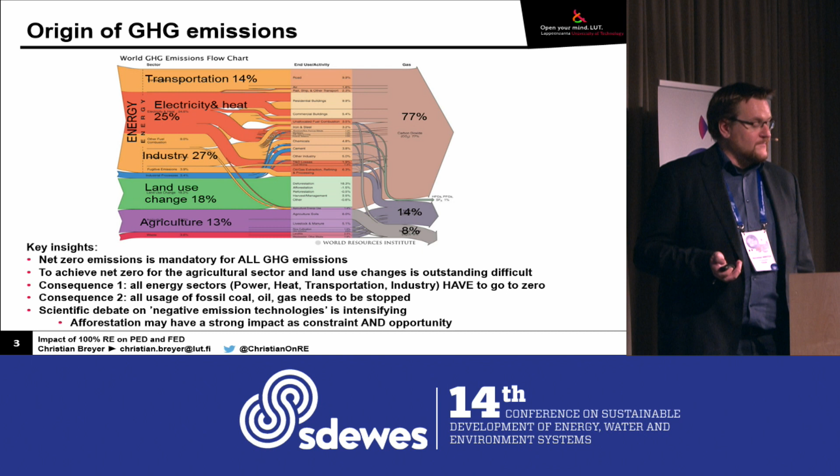Because to be net negative, we already have to fix the agricultural sector in particular, so there is no excuse in the energy system. Every fossil molecule in 2050 which still remains in the energy system is a failure. That will be the consequence of that. Luckily, more and more get this point. I was very happy to see this news. It was spring this year that

several European member states called on the European Commission: please provide us better scenarios. Because last autumn we got a lot of nice European Commission scenarios. Even net zero emission scenarios have been there, but not a single 100% renewable scenario. And this violates the policy of several European member states, where it's the clear dedicated policy target to go for 100% renewables. So that's good news. We already saw the picture of Greta Thunberg today. And please remember what we have observed just a few days ago.

This was for September 20th, where there have been the climate demonstrations, school strikes all over the world. In this one single week, which had been the peak of this demonstration so far, there have been 7 million people, most of them not even yet allowed to vote, on the streets globally, on all continents, in several countries, in several cities in the world. It had been by far the largest demonstration on any topic ever in history, and we should take it seriously. So hopefully in a few years we can say this had been the societal tipping point.

It was already mentioned that not everyone has the idea that kids should fight for their future. Luckily, with Scientists for Future in several countries in the world, we nowadays even have a science paper on that from different scientists in the world supporting it. This is just another paper from the German-speaking scientists. So it's really important that we have this very strong alliance, that the youth of the world really do what they have been taught in school: rely on and trust in facts. And these, of course, one can find in science. Maybe this is nowadays, unfortunately, news in policy, but it's important that we go back to science and facts.

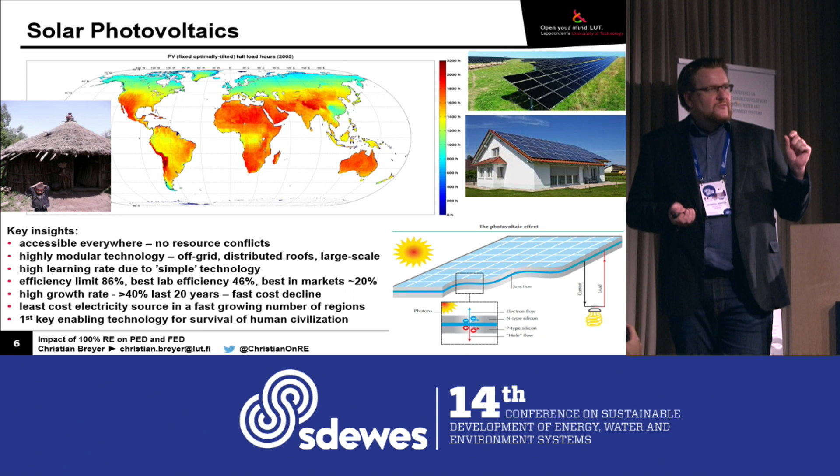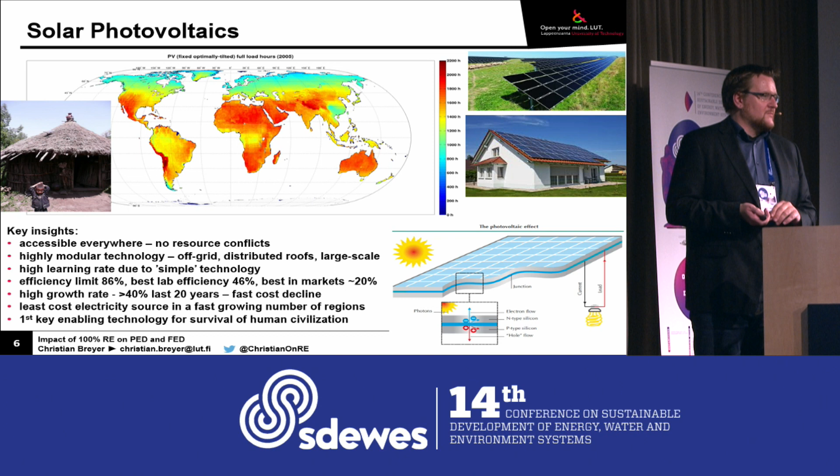The most important number on this diagram is the number you cannot see directly. It's a factor of 2. Go to the moderate regions, the subarctic, I'm from Finland, and then take the very sunny regions in the world: there is only a factor of 2 in solar irradiation. That means if it costs 2 euro cents a kilowatt hour, or 20 euros a megawatt hour, to produce solar electricity in the Sunbelt, then it costs 40 euros a megawatt hour in the subarctic. This is the most important message. And it will further decline.

Then a most important further component, batteries and electric vehicles. So as a stationary battery in buildings, this is Tesla Model 3, what we can even enjoy here, so that's really great. And we see steep growth rates for electric vehicles in the recent years, between 50 and 70%, and this is exactly what we need. This is also driven by cost decline of the battery cost, and in the end this will be very beneficial for both of these products, but of course we will see it in more.

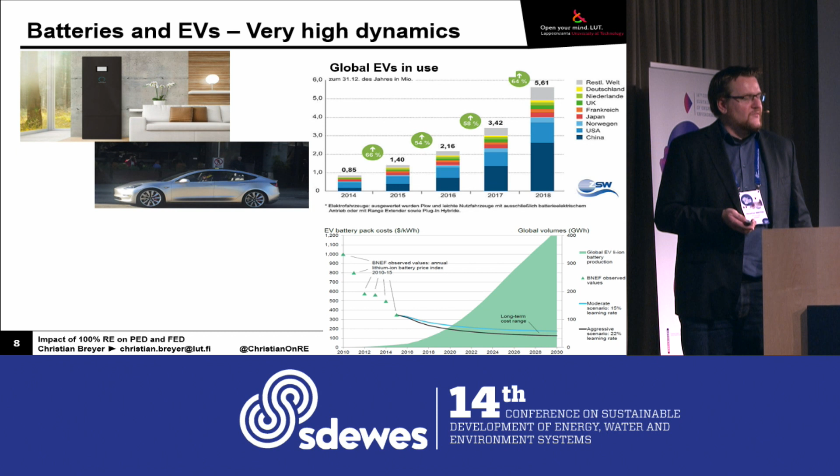And then the fourth most relevant technology, or it's more a bunch of technologies, for the most complicated and really hard to abate segments of the energy system, is all what we call power to X. If the starting point of research started in the fossil world, then we typically call it CCU, but in the end it's typically the same, whether we have carbon capture and utilization or power to something. From a specific point onwards, we all talk on the same topics.

The idea here is that we have sustainable electricity, then we go to hydrogen, where we need then water. If we want to go to hydrocarbons, then we need the CO2 from somewhere. If we have a sustainable CO2 source, and some of them exist, or a not avoidable CO2 source, just think on the limestone part of cement mills, very, very difficult to substitute. Then we have waste incinerators for municipal solid waste.

There will be always something remaining. And then, for example, pulp and paper mills, sewage treatment plants. So we have some point sources of CO2 we can use very well. And the rest we can take from the air, as this indicates with CO2 direct air capture. And then we get the entire world of hydrocarbons.

So we have to start with CO2 or carbon monoxide here. With hydrogen we have the syngas. Then we can go to methanol, to olefins, we can go to Fischer-Tropsch with diesel, naphtha, whatever we want. Or, of course, with hydrogen, and again from air, but then it's nitrogen from the air, we can go to ammonia, we can use it as a fuel, we can use it for fertilizers.

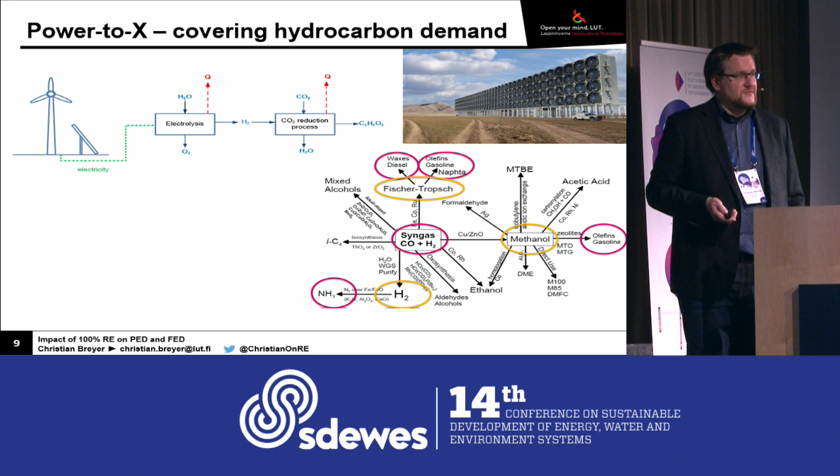And only the ammonia industry, as of today, where the hydrogen comes from fossil steam methane reforming, produces 1% of all our greenhouse gases. And the entire chemical industry, 5%. So there is a lot to be taken. Now there is a very strong rationale for electrification, and this is in the end efficiency. And this brings me already close to the core topic of this talk.

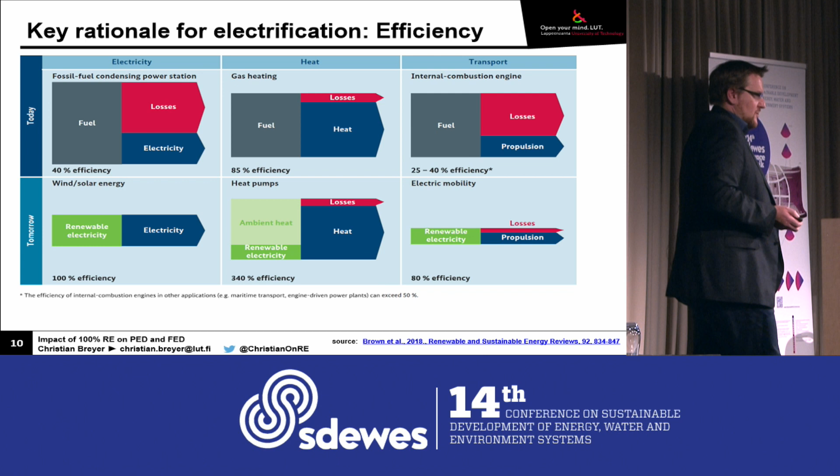Let's start with electricity. So what is the main segment as of today where we get electricity from? It's typically thermal power plants. 40% efficiency, by the way, is already optimistic. In the latest World Energy Outlook, you find that the average efficiency of all thermal power plants in the world is 35%. So the consequence in the real world is the primary product of these plants are clouds and warm water for fish when it's cooled down. In other words, the second law of thermodynamics is not our friend when it comes to efficiency. So this is the cause of it.

When we compare that to renewables, then we have very, very high efficiencies. And here I have to explain how we define primary energy. Primary energy, at least in most definitions, is when we extract energy for the very first time from the environment. The consequence is that crude oil produced, or gas in a gas field, or coal in a coal mine, is then defined as primary energy. The same when we cut down a tree, from this moment on it's primary energy.

However, it's the same when we have a water flow through a turbine, then we have primary energy, but then it's now electricity. It's the very first time that we extract it from the environment. And of course, the same is true when we have a wind turbine where we have the wind flow, then it's converted directly to electricity, or the same with a photovoltaic system. Due to that, this is the right comparison of efficiency when we have the first step of primary energy.

We can compare that to heat. If we have very efficient heat systems, then we can be maybe even up close to 100%. We know such solutions, they're really great.

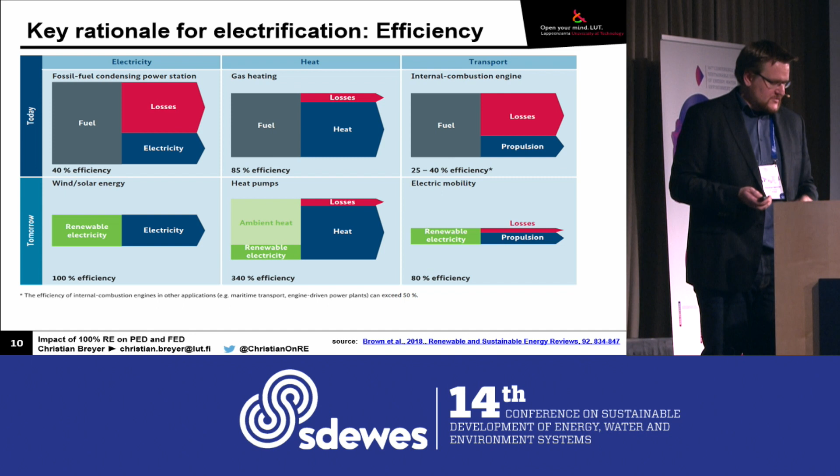Okay, so let's have a preliminary insight for the energy transition to very high shares of renewables. First of all, the increase of efficiency is the substitution of thermal power plants with renewable electricity, the introduction of heat pumps, substitution of combustion road vehicles with battery electric solutions. By the way, thermal desalination with reverse osmosis is the same. There we have the highest efficiency gain. We talk on a factor of 4. So this is really outstanding. But there is a phase change in between that makes the difference.

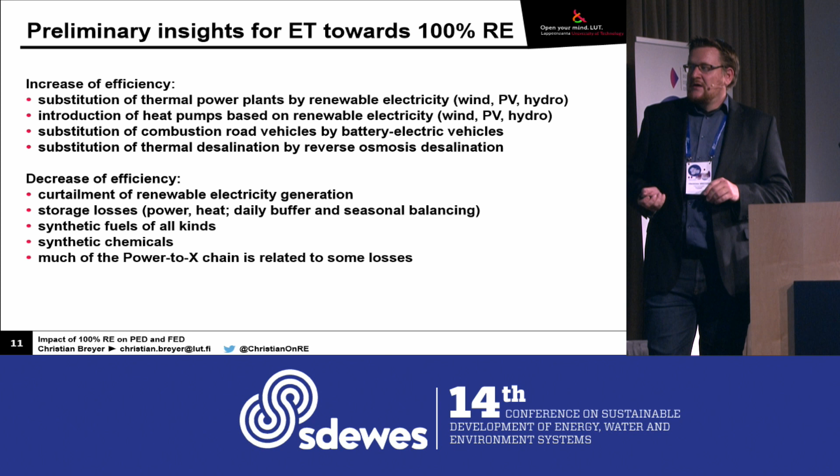However, we have also other factors, and this makes it a bit more doubtful. And of course, the opponents of highly renewable solutions always point to these items, and of course we have to investigate more. The curtailment of renewable electricity generation is a loss of energy without any doubt. We have storage losses for power, for heat, daily buffers, seasonal balancing. We have synthetic fuels of all kinds that we need if we want to remove all fossil fuels from industrial and energetic use, synthetic chemicals, and much of the power-to-X chain is related to some losses. And now the key question is, are the efficiency gains higher than the additional losses? Good question. It took me the last 10 years to get a bit closer to that, and I would like to share some of the insights.

First of all, a quick overview on 100% renewables. So we have now more than 50 countries committing to that, and I think it was really a tipping point when California switched last year. Then everything became much more serious, and the opponents, how to say, put down their volume. We have it with cities. Several countries are already there, by the way, and more companies committing to the target, which is really good.

And I'm very happy that Henrik Lund is just sitting here. We did this paper together where we did a kind of first overview of where in the world 100% renewable energy systems are studied. And we have to conclude that in Europe we understand it quite well. In Australia it's very well understood. In the US there is a super good leading team. What the rest of the universities do on the topic, I still question myself. But for the other regions in the world, it's not yet well understood. So much more emphasis has to be placed there.

And what's important, of course, we see a growing trend, in particular for the last 10 years, that there are increasing numbers of papers, and also more and more of the papers really focus on the total energy system, what we then call a smart energy system.

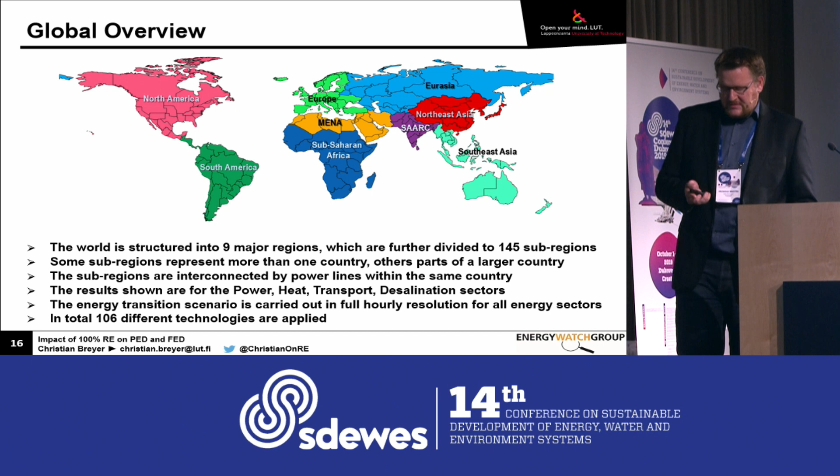What does it mean for electricity generation? Here you can see we have this year maybe around 28,000 terawatt hours of electricity demand generation, and that will go up far beyond 100,000 terawatt hours. But of course the reason is that practically the entire energy system shifts toward electricity, and the reason is in the very end that here we find the sustainable solutions in an affordable way.

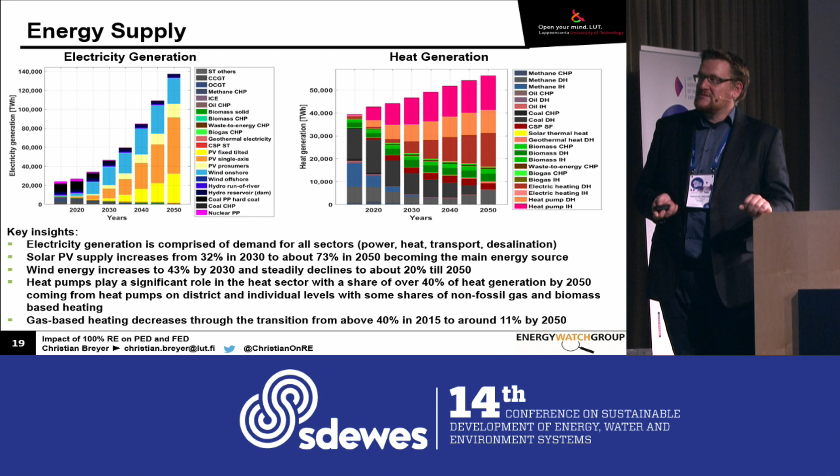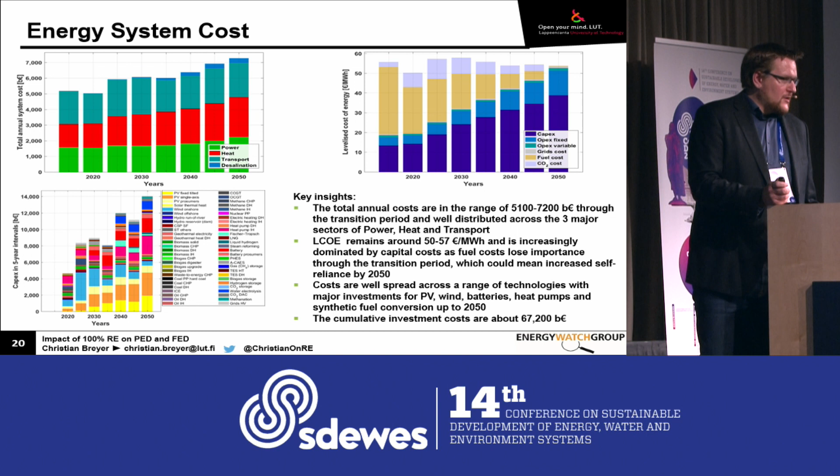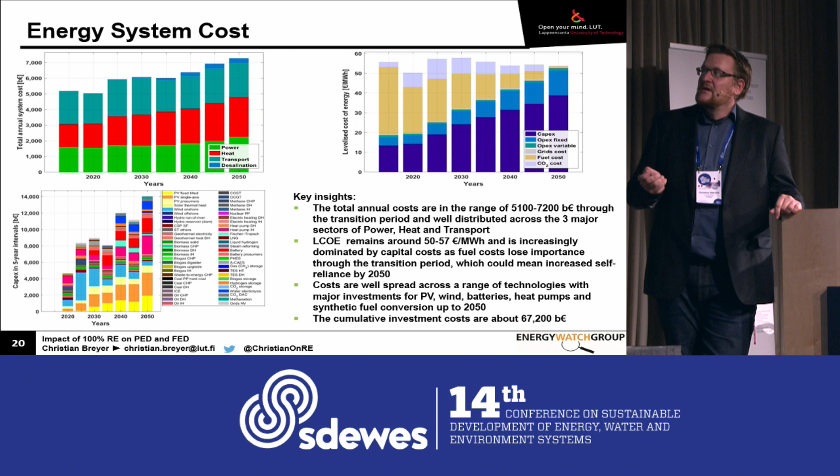What does it mean now for the energy system cost? Because we all know the creation of such scenarios might be not so complicated. We do it by definition, but in the end it's always the question of society how to pay for it. And I guess here the message is really different, because the message is, yes, we can go for a transition, and I will show you in some slides later. We talk on a 1.5 degree scenario in the very end. But the transition can be in a cost-neutral way, if we do it in an optimized way. And this is, of course, in strong contradiction to what we typically hear from 1.5 degrees Celsius scenarios, and I will come back to that in my very last slide.

The question is then, do we need some storage? Yes, of course, we need quite a lot of storage, as you can see here. So storage output for electricity sector, for heat sector. The good news is, if the cost of batteries go down as we saw in the last decade and as it's projected to continue, then we have the perfect basis for a most efficient storage. First of all, we can use them for a long enough period. We can, in principle, recycle them, and the efficiency is high. So that's all very, very good. As a consequence, a lot of batteries are found in the solution.

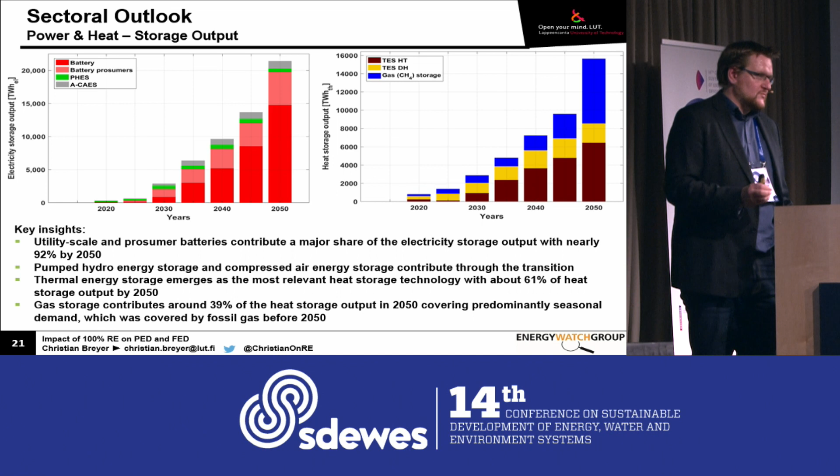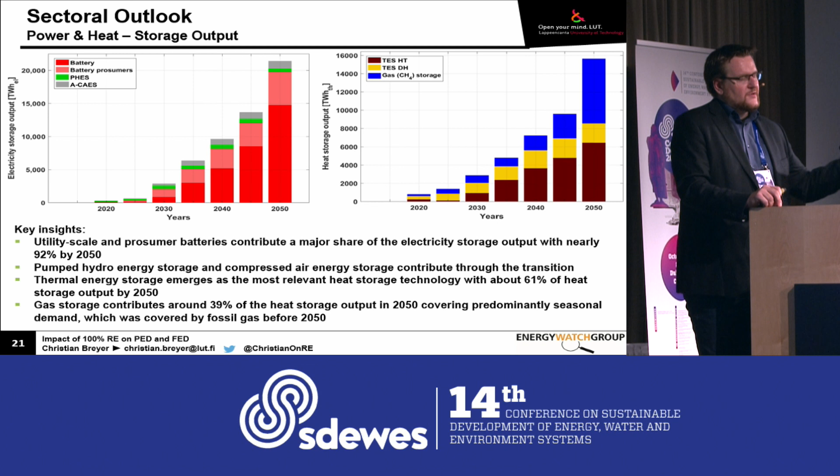When it comes to heat, then it's high temperature heat storage, district heating, of course, and gas. Gases, we modeled it to be on the safe side with methane, but I guess in the next update there will be not much methane any more, and the reason is we don't trust that the leakage is zero. Whenever you have a leakage in the methane system, then you have one methane molecule with a factor of 100 more global warming potential in the next 10 to 20 years compared to a CO2 molecule. And since we are close to the major tipping points in the world, it's not acceptable. So we have to be very careful when it comes to methane, if there are better solutions, of course.

Transport sector, this is important to explain to you. We are super conservative from the other side in that scenario. And super conservative means there is a factor of 3 assumption for more transport kilometers and passenger kilometers from 2015 to 2050. So a factor of 3 in more energy services. This is based on respective international references from IPCC or International Aviation Association or International Maritime Organization, so we should be on safe ground. But this is in strong contradiction to most global 100% renewable scenarios. Most assumption there is we will not travel much anymore. And I don't trust in that, because I know all of us, and that we send the goods all around, so better be on the safe side. If we need less of the services, perfect, but better to be conservative, to have a higher assumption.

Here, for example, the assumption for cars: the current car stock in the world is 1.2 billion cars, which grows by 100 million cars a year, and we have the assumption to stabilize, hopefully, around 2.5 billion cars, or 3, but somewhere in that order. But this would already assume that, for example, in a region like Europe, we all together have fewer cars per capita. Hopefully this trend will happen. But the good news is, if we then factor this through our model, then we find that despite the factor of 3 more services, the final energy demand stays more or less stable. And this is, of course, quite remarkable.

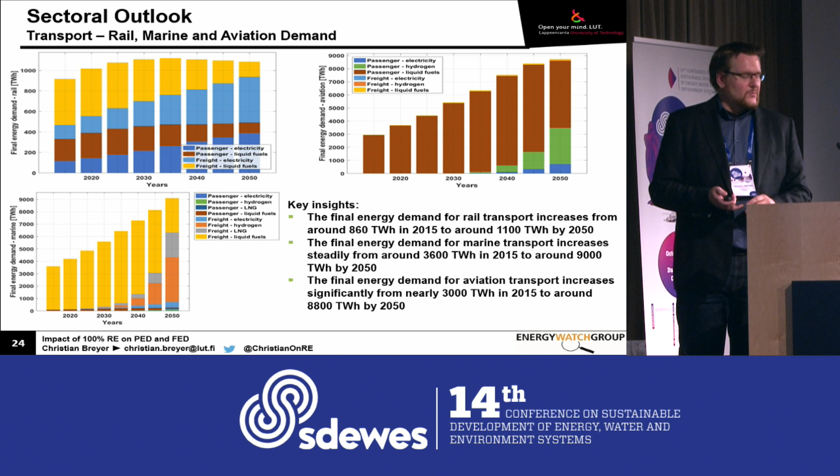And there you can see that even with a strong increase in demand, the total final energy demand for road goes down. It's not so lucky when we talk on marine, what you can see here, or aviation, what you can see here. Here really a factor of 3 in more demand really translates to more final energy demand. And this, of course, from a primary energy point of view, hurts even more if we go to power to fuels. And this you can see here.

And this is, maybe I focus on this diagram here. This was also kind of a shock for me when I saw it the very first time. When you regard the full transport sector, and please do that, we have several models where the transport sector is modeled, but only for the road segment. But the road segment might be hard to believe, but still the easygoing part.

What is really, really hard is marine and aviation, because there we have either huge volumes of biofuels we may not have, or we have to do it with power to fuels. But other sustainable options we don't have, except we go for the degrowth option, and then we do not send goods and people anymore around. But it's complicated to find a good solution.

Direct electrification when it comes to train, short distance shipping, we have assumed direct electric. We know there is a policy target in Norway in 2040 to have all flights within 500 kilometers around Oslo all electric. And there are currently a lot of development startups and companies developing all electric flights with up to 100, 150 passengers. But the point is most of the flights are intercontinental. So in the very end we have roughly a third with direct electricity, and then is the question how to do the rest.

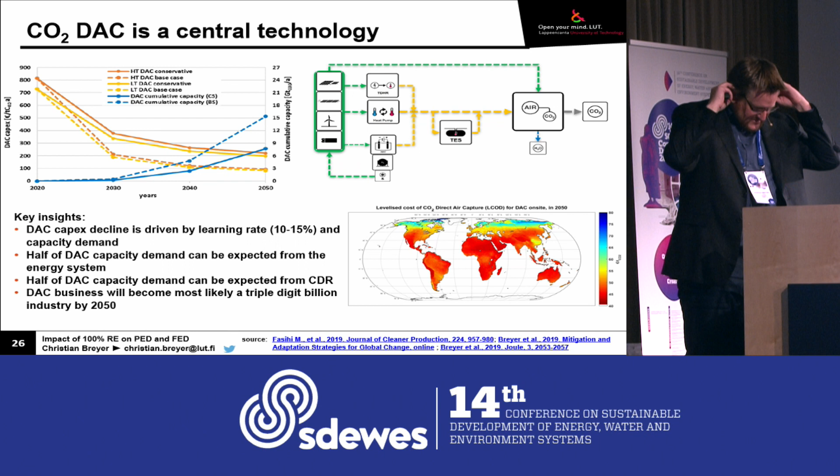Oops. So it should work now again, sorry.

So we should have good chances with heat pumps, and then we can extract CO2 from the air. If you look into the literature, then typically you find very high cost points based on a technique which requires very high temperature. At least these are most of the publications. And for the low temperature route, there is a minor share of the publications, but practically all startups or companies in the world developing this technology are on the low temperature route for good reasons.

If you then model it on the low temperature route, and luckily we have now several publications on that, it's doable, well doable, that around 2050 in practically all relevant regions in the world, one gets it around 50 euros per ton. And then it makes sense for all power to X. If there is waste heat available, then it can go down to, let's say, 35 euros per ton.

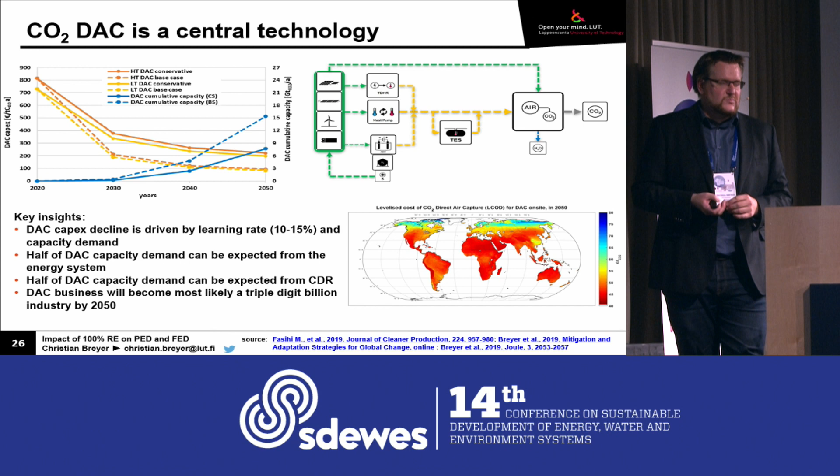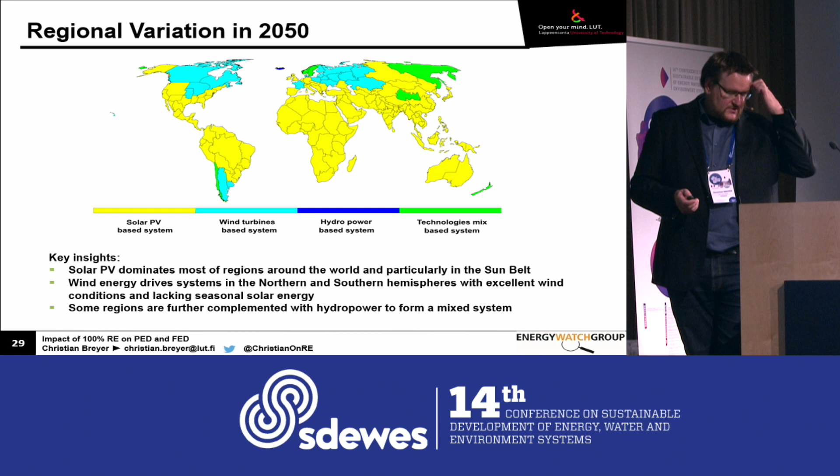When we then have a look at the regional variation, again you can see most regions in the world would be based on solar energy, but there are regions with excellent wind access where it would be a wind-based system. So based means at least 50% of all primary energy from the source. Still some hydropower here and there, and then we have some regions with a technology mix, which is typically wind and solar.

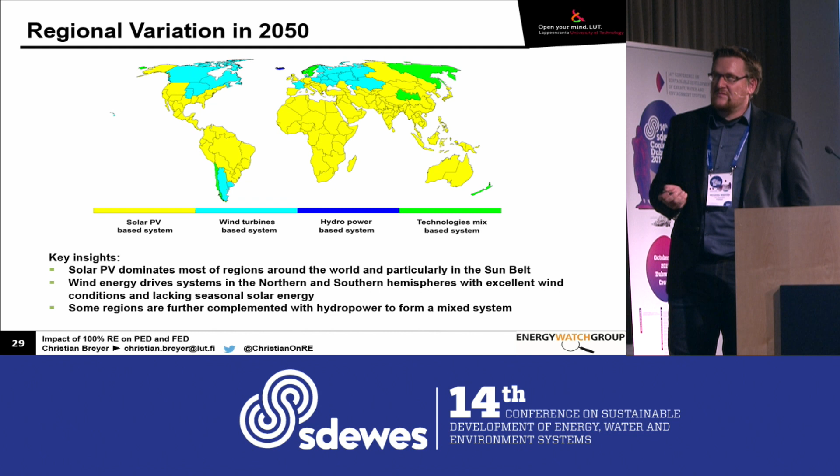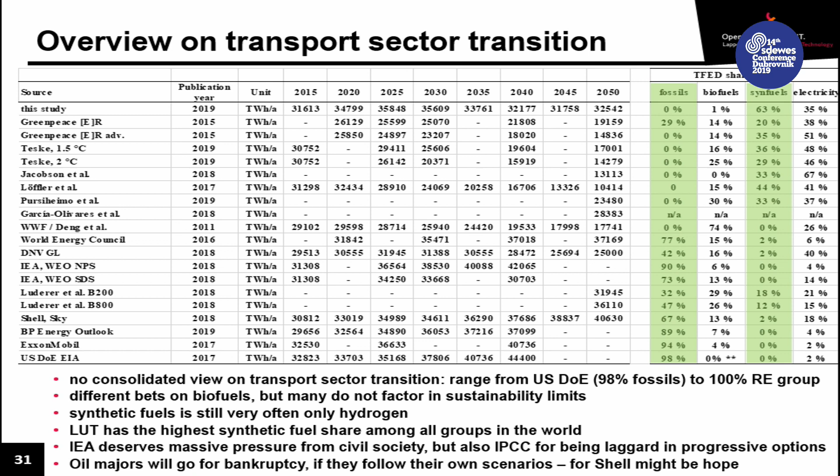And then we have, how to say, the more conventional group. And there you find very high shares of fossil fuels, and this practically cannot have anything to do with a 1.5 degrees Celsius scenario, so they do not fulfill the ambitious targets of the Paris Agreement. However, there are differences. Just compare the most ambitious Shell scenario to the other fossil guys. Then you see they have noticed there is something happening on the road with electric vehicles, and even synthetic fuels exist. For BP and Exxon, this is still something new.

I was really surprised when I then compared our synfuel share in the total final energy demand. There we have the highest of all. But the reason is we do not bet on energy crops. So in our model there are no energy crops. It's only byproducts, residues and waste from bioenergy, for sustainability reasons. Okay, so we agree again there is no consensus. Maybe we have expected that.

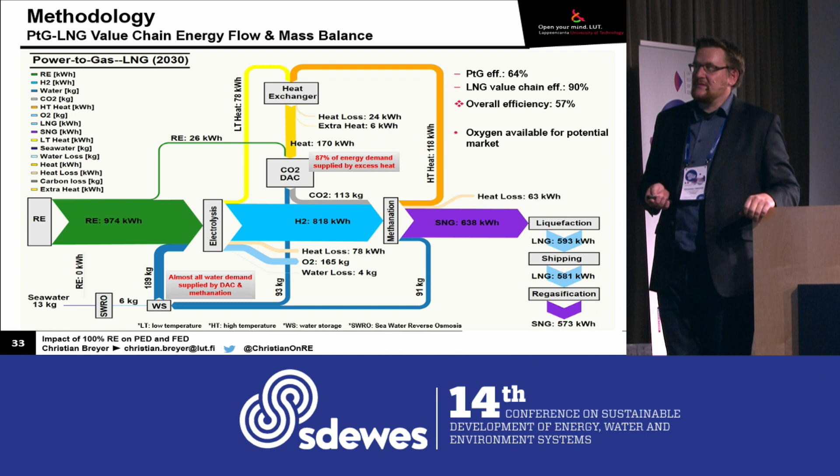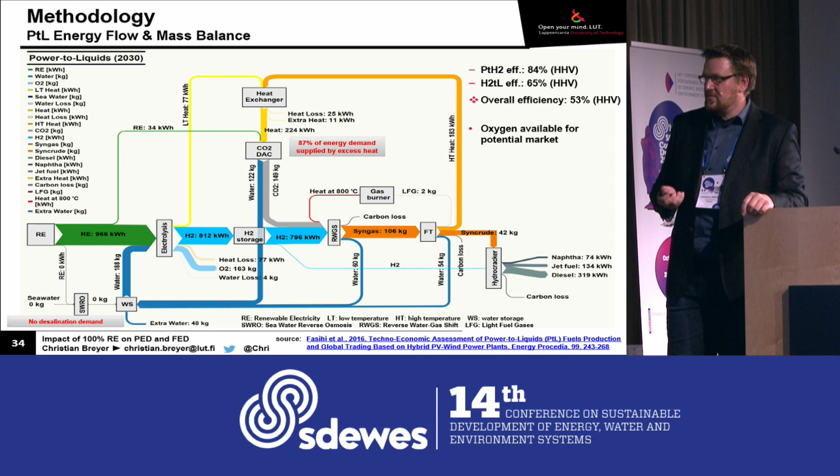This is similar, but now it's a Fischer-Tropsch process. So we start with renewable electricity, go to hydrogen, then to syngas, where CO2 has to come from somewhere. This is assumed from direct air capture. Then we have syncrude, hydrocrackers. Again, we then have jet fuel and diesel. It can be adjusted in different ratios. Naphtha can be used for the chemical industry. Again, the efficiency is around 50%, maybe a bit more, but around 50%.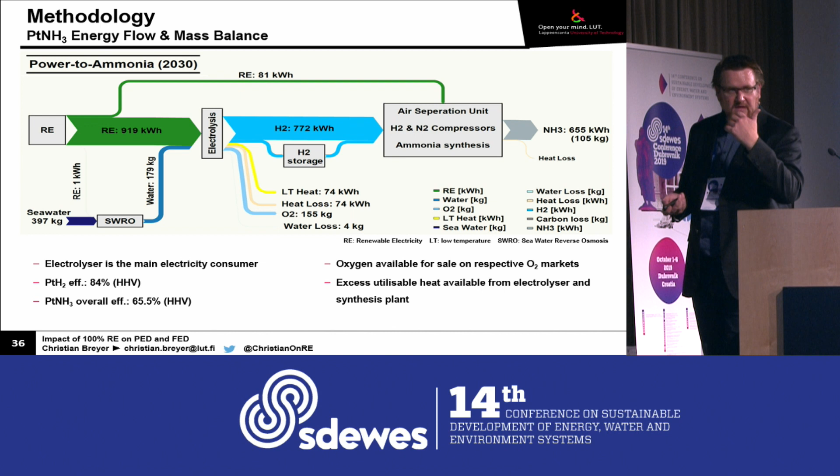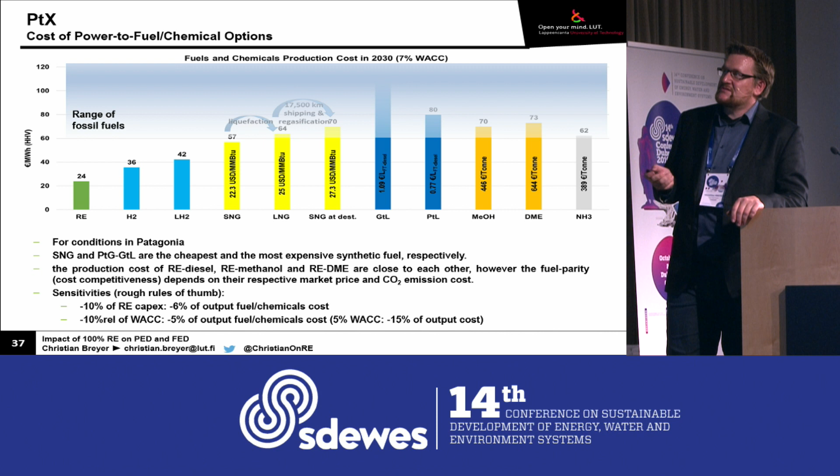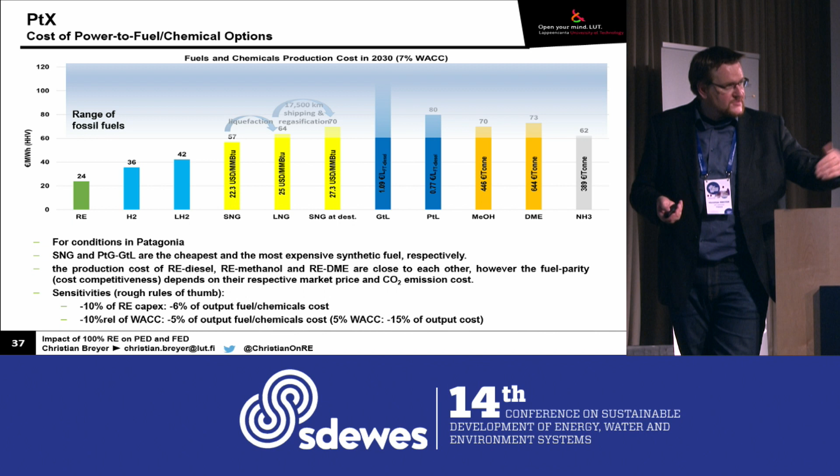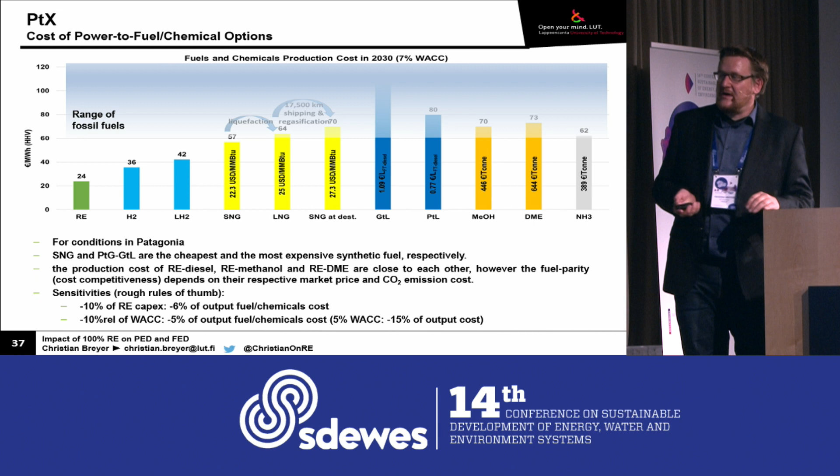Summing up, we did this once and compared it roughly. What is the range of fossil fuels with cost assumptions for the year 2030 with a cost of capital of 7%, which in specific constraints should work. And then one says this starts to be in the range that it makes sense. So now assume a CO2 price of 50 euros per ton for fossil emissions or higher, plus fast declining cost of renewable electricity and scaling, then these power to X options are really in scale. That's very important.

Now let's sum up. Various losses in the 100% renewable system are there. Luckily, and these are mainly the results we found in the last few years, electricity storage losses are surprisingly low. The reason is that only roughly 1/3 of the generation has to be stored, and the rest can be used directly if we have overall optimized systems. Overall optimized means we have a generation portfolio, solar, wind, hydro, biomass, and we use them when they're really needed or available in an optimized way.

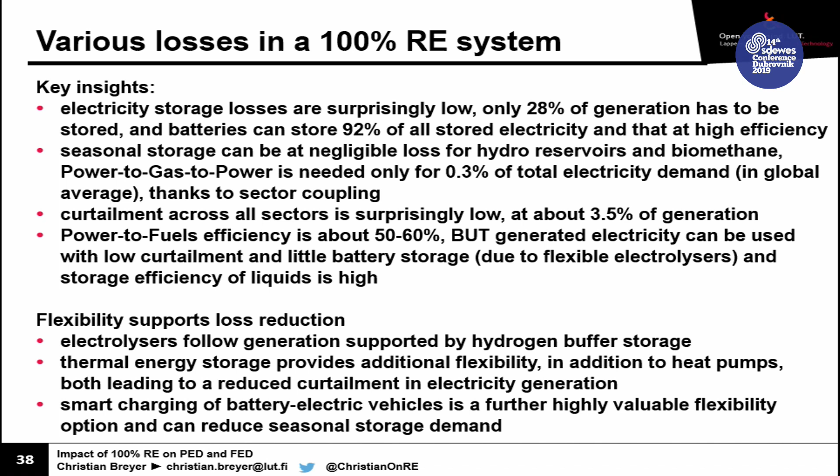Batteries can store most of the electricity as the least cost storage for electricity, so we regularly find 90%, and they're at high efficiency, so we don't have much storage losses. Seasonal storage can be at a negligible loss, and this was a major surprise for me because I started with that research 10 years ago, and there we had huge losses, but the reason was a not well adjusted energy system. In the latest simulations, we only need power to gas to power for 0.3% of the total electricity demand, and the rest can be captured by other flexibility options, in particular hydro reservoirs, biomethane, and other options.

The curtailment is also surprisingly low, so we find now values below 5%, but you have to be a sector-coupled system, and a very flexible one. And we find a lot of papers where they even have 30, 40, 50% of curtailment. If you see such a paper as a referee, reject it, it's for sure wrong. All values above 10% have to be checked in much detail, whether it's really okay and whether it's the cost optimum. But for sure more than 20% cannot be true.

Power to fuels efficiency is about 50 to 60%, as already mentioned before. However, it can also help to drastically reduce the curtailment, and the reason is flexible electrolyzers. You saw hydrogen everywhere, but if you have low-cost electrolyzers, then they can follow PV and wind, and that makes it really valuable. Flexibility, of course, supports the loss reduction.

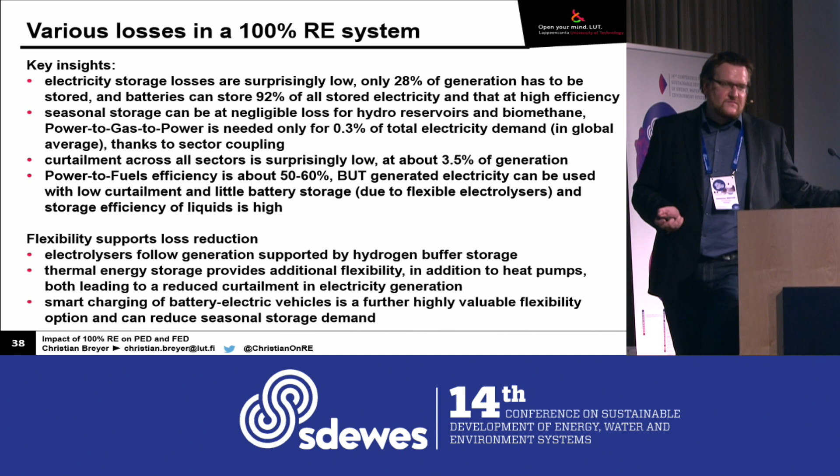Electrolyzers I already mentioned. Thermal energy storage delivers flexibility that we see in district heating and other solutions. In addition, with heat pumps, they can follow the availability, and this can also reduce curtailment. And of course, smart charging of battery electric vehicles is a very valuable source, vehicle to grid as well. Due to time, I would like to skip this and now come back to the core of the entire talk. So what does it mean in the long term?

So this is when we aggregate power, heat, and transport. By the way, industrial demand is included in power, heat, and transport as well. The only thing missing there is chemical industry with the non-energetic demand. That's not yet there and would be roughly 10,000 terawatt hours more.

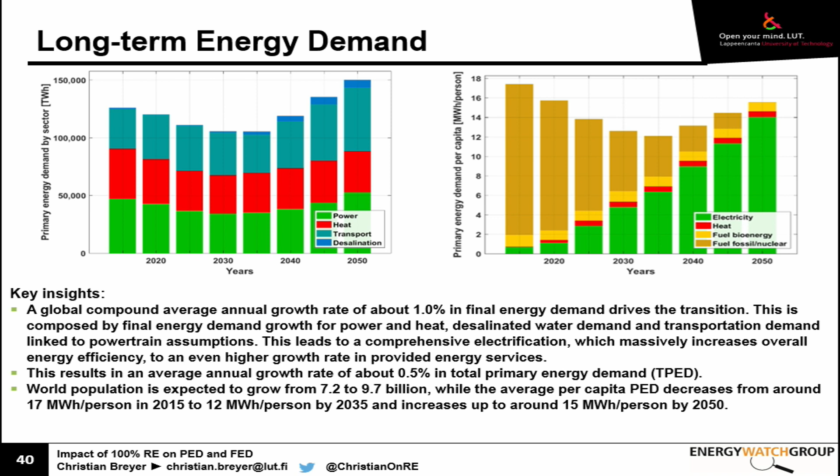And this is the key advantage of going to 100% renewables from an efficiency point of view. We get a much more efficient energy system, and the reason is we go much more for electricity. And you see it here, this is the primary energy demand, again the same shape as here, but now in the fuels. So with electricity, heat, and the fuel demand. And you see in the end, from the primary energy point of view, it's 90% electricity.

If you go from the final energy point of view, you don't see it, because there is of course still a lot of fuel demand in marine and aviation, for example. There's a lot of heat demand for industrial process heat, but also for space heating demand, but it started with electricity before. So we have to be very careful when we report on the share of electricity, whether we talk on final energy or primary energy. That really makes a difference.